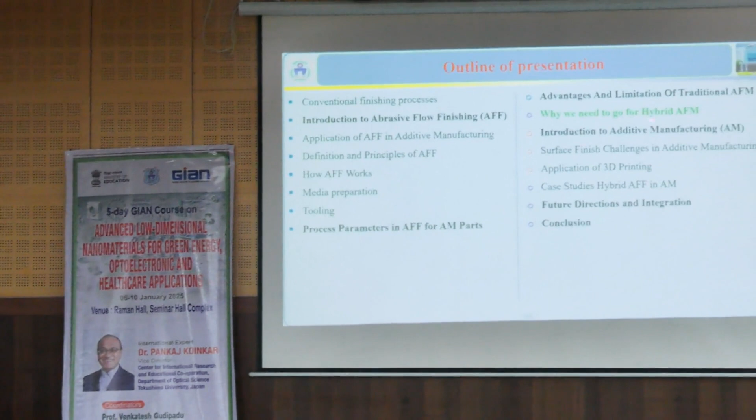So the major outlines of the presentation will be discussing conventional finishing processes and their limitations and advantages, introduction to abrasive flow finishing process, and several things about surface finishing challenges of AM components and future directions, some case studies, etc.

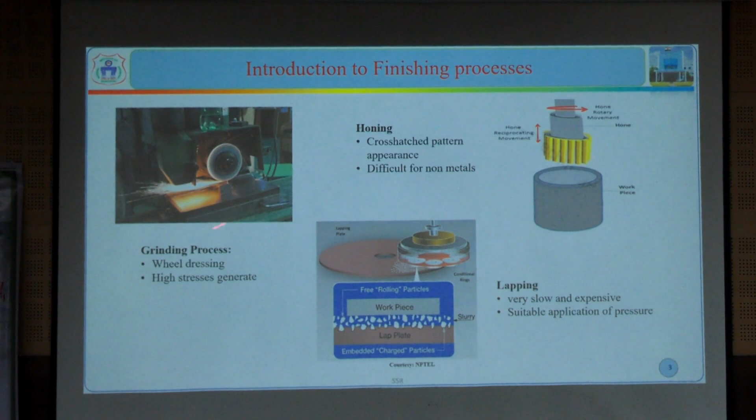So we all know what finishing processes are, right? We have conventional finishing and non-conventional finishing processes. In conventional finishing processes such as grinding, honing and lapping, whenever you finish the materials, there are some constraints with respect to the geometry of the material. You can finish only a flat workpiece, or a cylindrical internal surface and external cylinders using a cylindrical grinder, and sometimes some concave surfaces using processes like grinding, lapping, honing, etc.

In these processes we use fine abrasive particles which act as a tool material. These fine abrasive particles remove the workpiece material in the form of chips, and these chips are in microns and nano level - so the material is removed at micro and nano level. These processes are not complete machining processes, they are finishing processes, meaning the material removal will be very low - in milligrams.

So there are certain processes where we get a cross hatch pattern. When we have a rotary as well as translatory motion, there is a chance of getting a cross hatch pattern, and we have some applications for getting the cross hatch pattern in finishing.

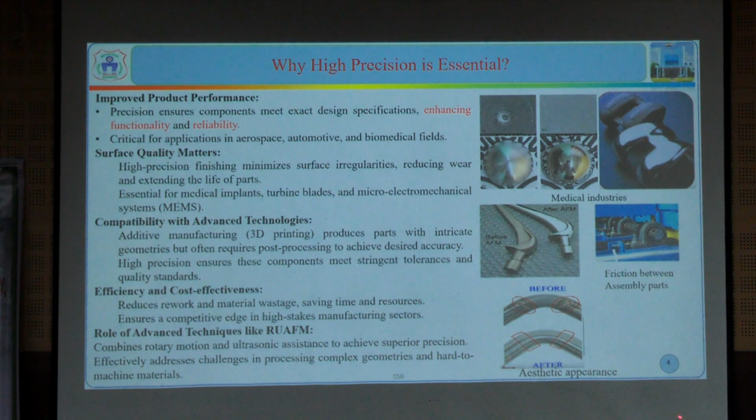Coming to surface finish challenges, we see complex components manufactured using additive manufacturing. You can see several implants here - orthopedic, dental implants - and several of these implants are 3D printed.

We will also see the lab today - the 3D printing, metal 3D printing lab, as well as our abrasive finishing lab. We'll also plan a Siemens visit, though this is not done for your batch, so that also will be planned.

So in order to address these issues, what is our problem? Our problem is if the components are very complex in nature, how to finish them, how to deburr them, and how to radius them. For such complex geometry we need certain advanced processes, not like grinding and honing lapping, which can be possible only for simple geometry.

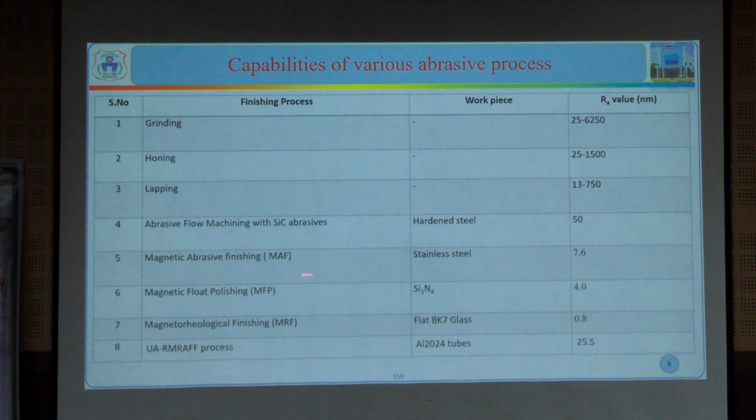When we see the capabilities of several finishing processes, finishing at micro level, nano level, and even Angstrom level, there are processes such as grinding, honing, lapping, abrasive flow machining, magnetic abrasive finishing, magnetic float polishing, magnetorheological finishing, and some hybrid processes.

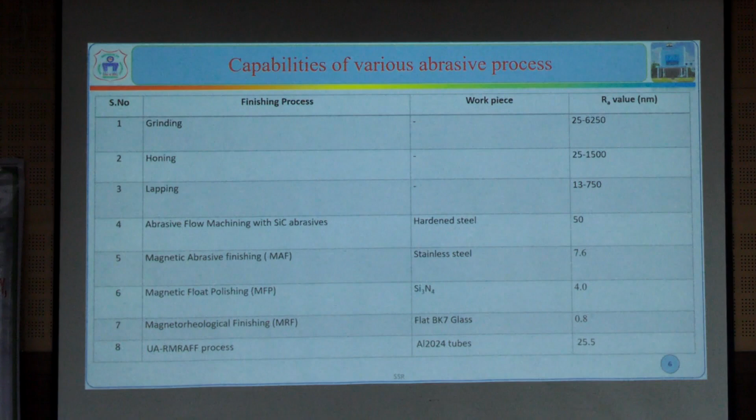So in all these processes we see what are the capabilities. You can see the Ra value in nanometer - this is the capability of grinding, this is the capability of honing, and we can observe the capability of abrasive flow machining. Our target is to reach nano level finishing of the complex components.

So I am working on one particular method - the name of the method is abrasive flow machining. This setup will achieve nano level finishing of complex geometries.

So what are the general challenges in modern metalworking industries? Development in material science - you have seen several cases of how material science is advancing, how new alloys and new materials are coming in the research field and in industry. So how to target them and make a possible solution for achieving the required specifications - one solution is abrasive flow machining.

Abrasive flow machining is a process developed during the 1960s, so it's not new. It was developed in 1960 by Extrude Hone Corporation in USA, and it got patented by the company. This technique comes under advanced machining processes as well as advanced finishing processes, and is capable of deburring, radiusing, polishing and removing the recast layer of finished components which are difficult to finish, and is used to finish complex internal passages of components.

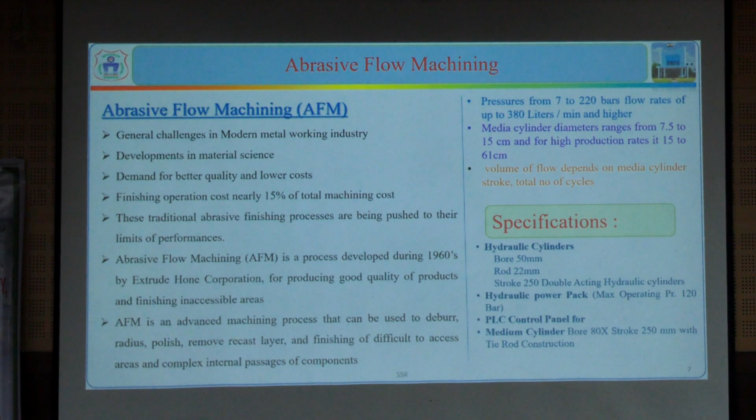Here I would like to show the principle of abrasive flow machining - the major principle and material removal mechanism. In this particular process there are three major components: one is the machine, second is the flexible tool, and the third is the fixture where we fix the workpiece. The machine we are using is a two-way acting hydraulic setup.

Can you see the image? We are using a two-way acting, vertically mounted hydraulic setup. Using this setup we can control pressure, flow volume, and flow rate of the hydraulic pressure - that's how we apply it.

And we have a semi-solid tool which is flexible in nature, kind of like the slime kids play with - we know how slime behaves. This kind of material is mixed with sharp-edged abrasive particles, and that is pumped in between the workpiece.

Let's say here we have a workpiece, a cylindrical workpiece, and this semi-solid media is pumped to and fro, flowing in between the target surface. When you pump this media under high pressure, passing over the target surface, the abrasives present in the media flow on the work surface, hitting the asperities at a certain force generated by the applied extrusion pressure.

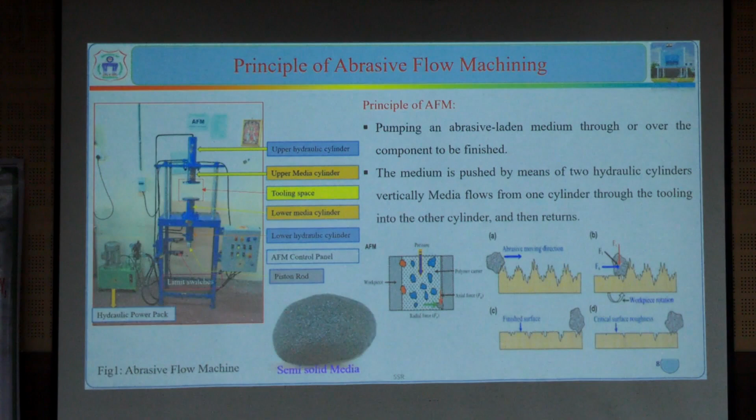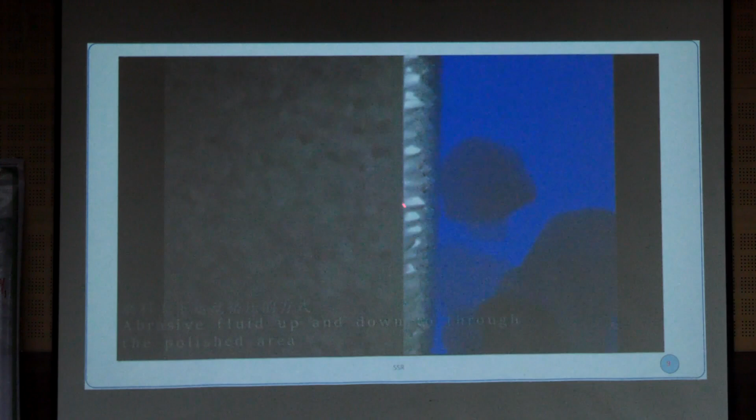So this is the technique I'm talking about. The yellow color shows the abrasive media and the blue color shows the workpiece. While pumping, these abrasives with a certain axial force cause abrasion to take place. You can see here the workpiece, non-cylindrical hole, internal finishing as well as external finishing done with abrasive flow machining.

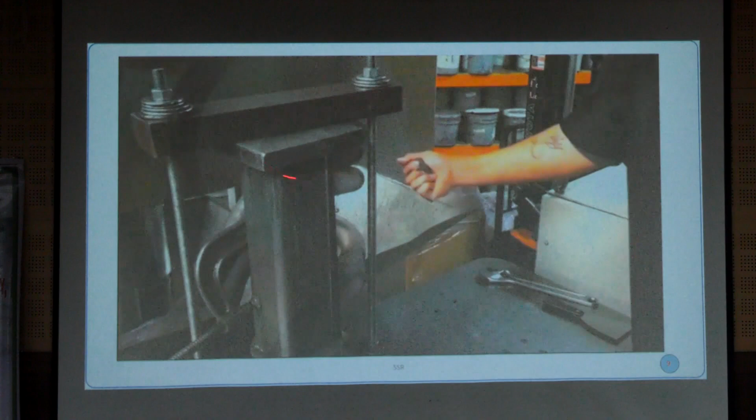This is a bit difficult to use as a simple process. In this video you can see the semi-solid media showing the abrasive particles. We can use silicon carbide, aluminum carbide, aluminum oxide, and boron carbide abrasives. You can see the media after mixing with the viscoelastic polymer, which we use as a gel for mixing the abrasive media.

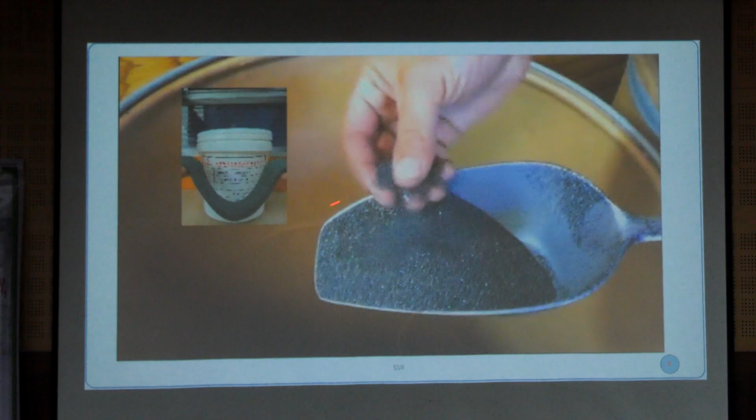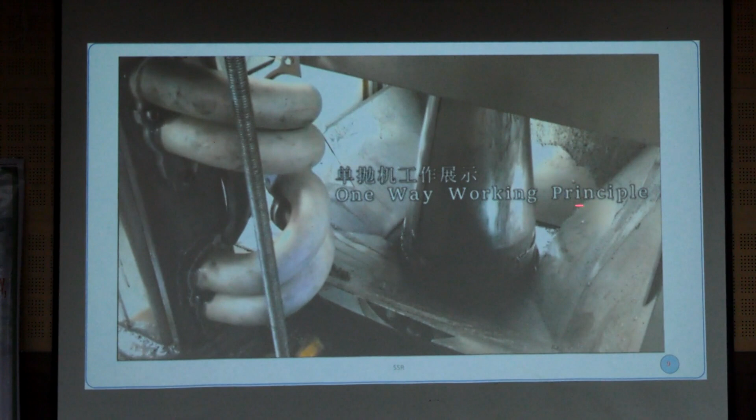This is a flexible tool, pumped in between the work surface. In the video you can see they are using a one-way abrasive flow machining, pumping that semi-solid media with high pressure, and the media is coming out from the workpiece.

This is the workpiece - these are manifolds used in our automobiles. The media is coming out from them, and while coming out it is doing the radiusing, deburring, and required correction. So we need to control that.

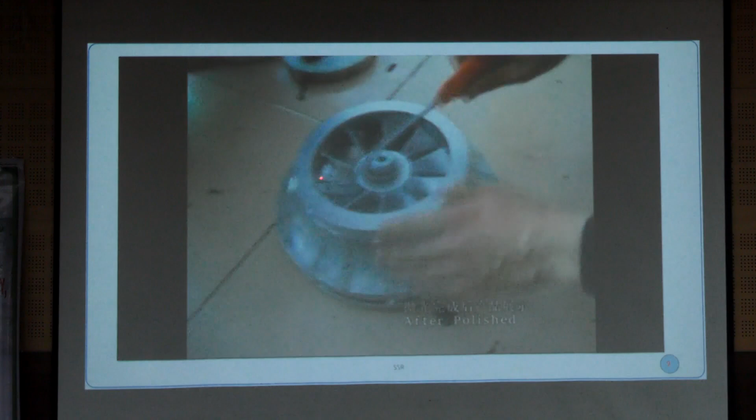These are some automobile components with complex geometry. After finishing, they remove the media. The media property is very important here - I will explain after the video.

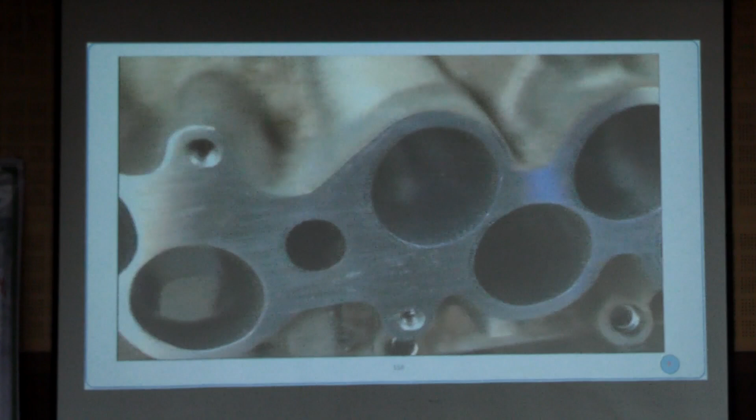You can see these kinds of components which are casted will have several issues after casting, so we require post-processing of these components - to radius them, to deburr them, to finish as per the requirements. So we do a lot of finishing techniques required.

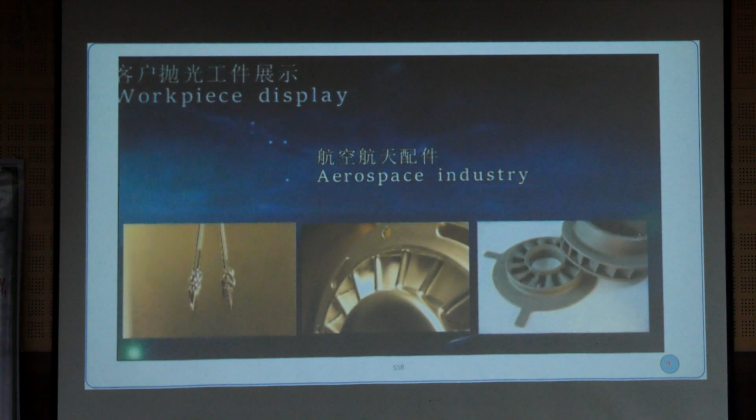And 3D printed components - using 3D printing we can print several complex geometries, and these 3D printed components can be super finished. In the aerospace industry, several components can be finished up to the nano level using this particular process.

Finishing of cross holes - for a straight hole we can use a simple process, but finishing of a cross hole, finishing of a blind hole, finishing of extrusion dies which are complex in nature, like you can see the channels - how do we finish the channels? Aluminum extrusion dies with different shapes.

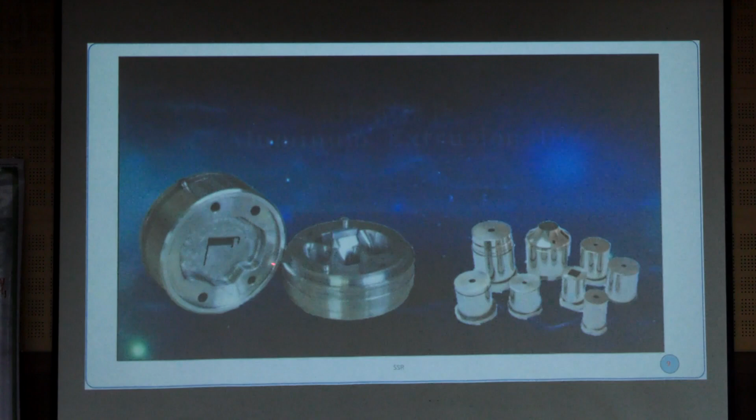Finishing of non-metals as well - ceramics finishing and polishing of several opticals, bent pipes, and metallurgical molds which are very hard with complex geometry. So mold polishing, even finishing of screw threads, glass mold polishing.

So I think you got some idea about the process we are discussing. We are using a novel flexible tool for finishing complex geometries. This tool, which is flexible in nature, will have viscoelastic properties - it will carry viscoelastic properties.

So what is this viscoelastic behavior? There is a lot of study on viscosity and also elasticity behavior of the polymer which we are using in the study. For example, when you brush your teeth with toothpaste - toothpaste viscosity is different and it has a different behavior, kind of a viscoelastic behavior, like a toothpaste gel.

If you add some salt particles to toothpaste and brush your teeth, you are applying certain pressure and brushing. The result is your teeth will shine because the paste is carrying the salt particles successfully and you are reaching the target finish.

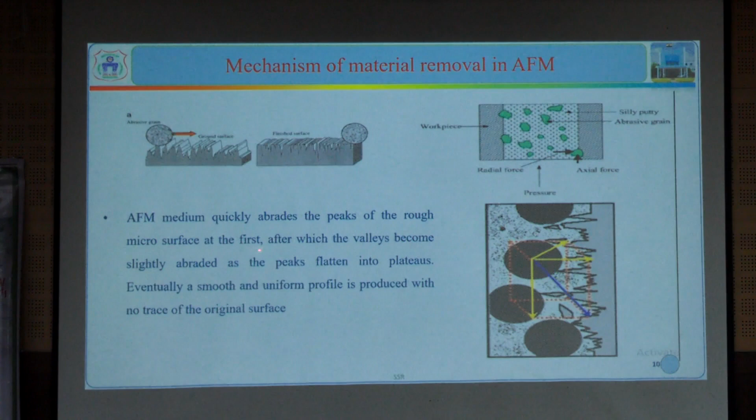The principle explains that in abrasive flow machining, the media quickly abrades the peaks of the rough microsurface first, after which the valleys become slightly abraded as the peaks flatten into plateaus. Eventually a smooth and uniform profile is produced with no trace of the original surface. So this is what happens during the process.

These abrasives hit the target surface and small microchips are removed from the target surface, and the process continues.

The third important component in the process is tooling, as was asked, like how the tooling is designed for different geometries and different workpieces, how the finishing is made possible. The major role of the tooling is that it holds the workpiece and also guides the media so that the media passes on the target surface.

So these two things we need to keep in mind while preparing the tooling or fixture. When we prepare a fixture, we need to keep in mind two things: one is a proper seat for your workpiece. You can see here, this workpiece is different, this workpiece is different, and there is some complex fixture here.

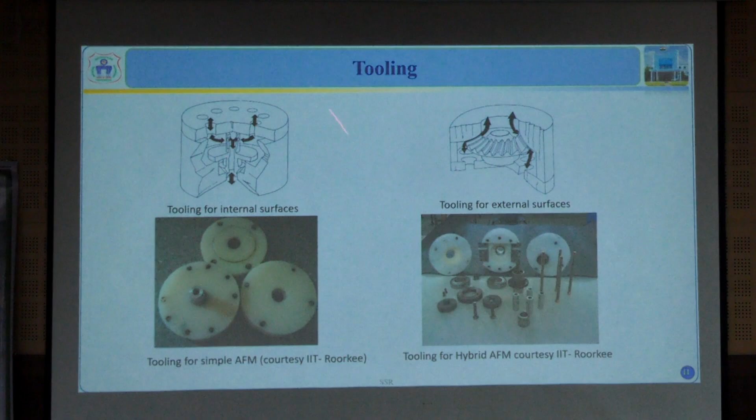For your designed workpiece, for your desired geometry, you need to first prepare a fixture. That fixture allows the workpiece to sit and also guides the media so that the media passes on the target surface.

So these two things. See the applications in turbine engine parts, before and after, in medical implants finishing, and whatever video we have seen. So we have seen all these kinds of applications.

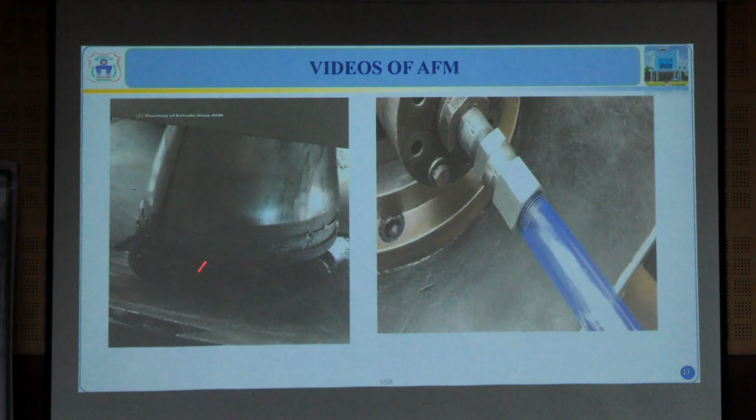To have some clarity on the finishing of bent pipes, complex geometries, and the flexibility of the media, this is a mixture with some mixing oil. In the laboratory you will see the media preparation as well as the fixture preparation, how the fixture is prepared, and then how the finishing takes place using this flexible media.

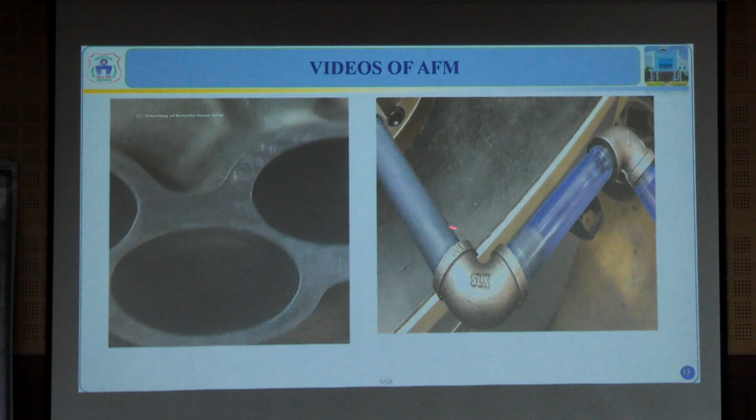So you can see here, this is the workpiece. This shows how the media is pumped to and fro, and how the finishing is taking place.

So whatever setup we developed was based on our project, based on our requirements in the lab. This is the design model. Initially we thought of designing the abrasive flow machining, or vertically acting abrasive flow machining. This is the design model and this is the fabricated model, and you can see the fixture.

So this is the fixture. If you disassemble the fixture, you will see the seat for the workpiece as well as the guidance of the media, so that the media flows to and fro on the target surface.

Okay, so we are targeting to finish the internal geometry of this workpiece, and how it can be done and what are the parameters that are playing a role and how the finishing takes place. So this video will show you the to and fro action that we expected.

So these are the medium cylinders, these blue color medium cylinders, and two acting hydraulic cylinders are there. We fill the flexible media inside one cylinder and pump the flexible media to and fro, passing through the target surface, in between the fixture. So this is a simple AFM. We will see some advancements, how people worked on different aspects, etc. So this is a to and fro action.

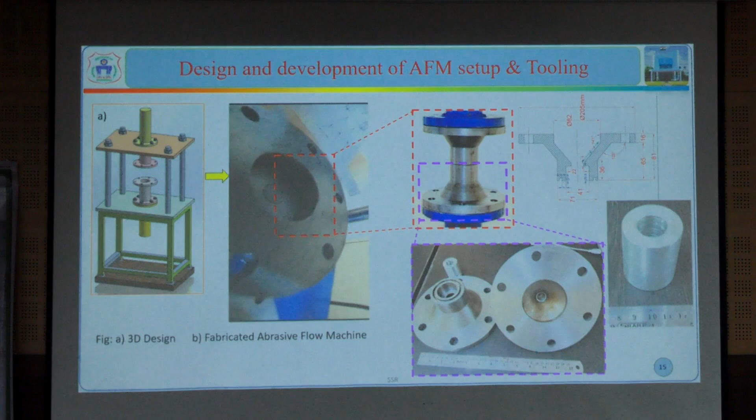Now we understand the principle, right? So what is the principle and what are the major components? As I said, three major components: one is the setup, second is the flexible media, and the third is fixture.

So we have designed, the literature says the influencing parameters of these three major components. When we take the machine settings, the major machine, extrusion pressure will play an important role. What is the pressure you are applying on your abrasive media, and based on that pressure your axial force will vary. The abrasive particle which the media is carrying will have certain axial force with respect to the applied extrusion pressure. So by varying the pressure, we actually have influence on the result.

Second is the number of cycles. How many cycles, like when we pump the media from one cylinder to another cylinder, we calculate it as one cycle. When the media is pumped from bottom cylinder to top cylinder and then from top to bottom again, we calculate it as one cycle. If you increase the number of cycles, the surface finish rate will vary. The surface finish will increase, and also the material removal will increase. So this is also one of the important parameters.

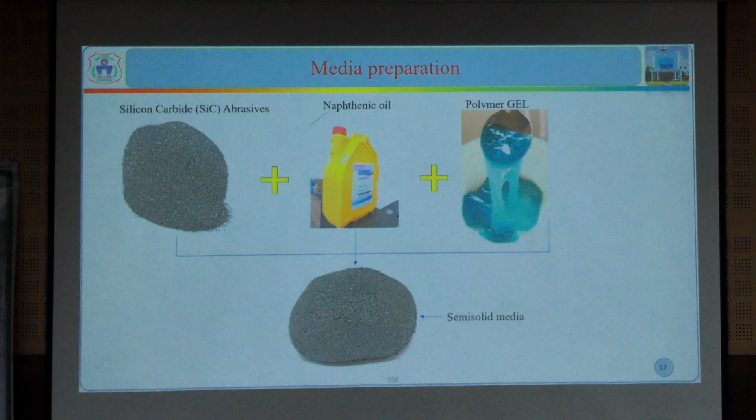So this is the media preparation. We will show a small demonstration also in the evening. The abrasive particles are mixed with the mixing oil, we use naphthenic based oil here, and the polymer gel, and how it becomes a flexible media, a semi-solid media, and how it can be tested, and how it can be used for functioning, for processing, for finishing, etc.

We use different grades of silicon carbide particles like 120 size, 80, 60, even 180 size, etc. Under scanning electron microscope, we have identified the size of the particle, the size we are choosing, and also the shape of the particle we can identify.

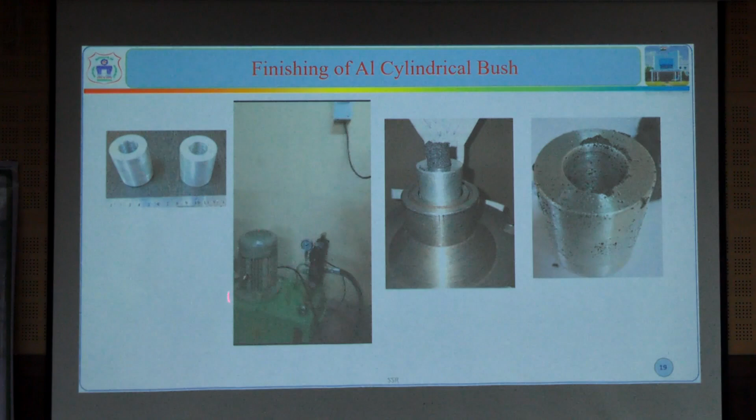While pumping the media, we observed before and after finishing of the sample under the defined pressure.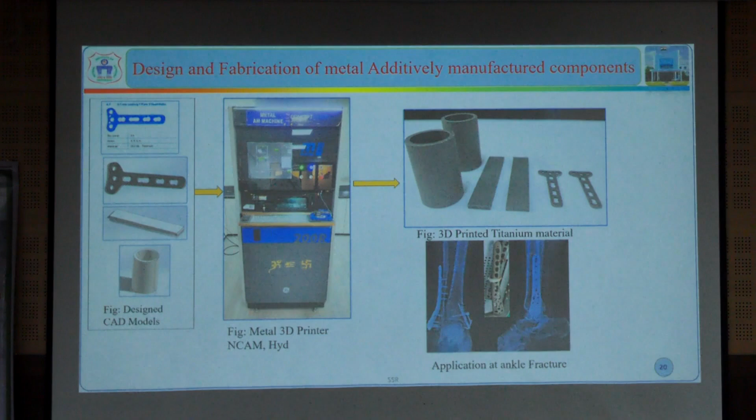We are also working on 3D printed components which have applications in medical, mainly fracture plates used in fixing the ankles. These fracture plates are planned to be finished using abrasive flow machining. We are studying before finishing and after finishing of the fracture plates. These are the 3D printed components. As part of the lab, we will also show the 3D printing lab, as well as our finishing lab, so you will get some idea of what we are working on.

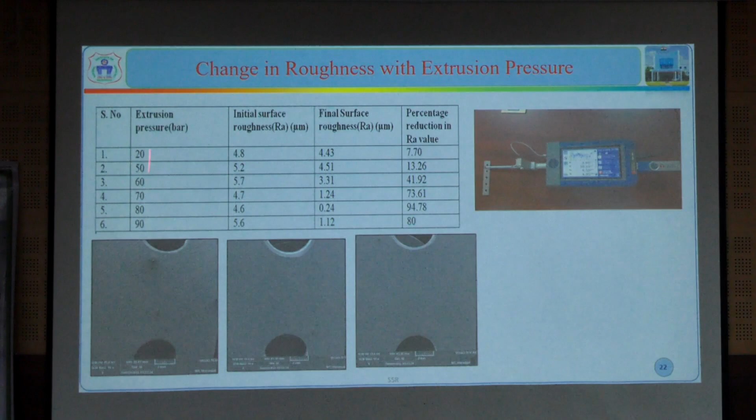We observed the finishing of the samples by varying the number of cycles and the extrusion pressure, and we could achieve some kind of mirror finish before and after abrasive flow machining. You can also see these are the conventional machining marks, the deep tool marks which are found by conventional machining, and the deep feed marks or deep tool marks are removed by abrasive flow machining.

This is not a final achievement. We need to work on improving it better. We need a mirror finish, mirror reflection, and also we need to take more complex geometries for finishing. So these are some of the results.

These are some of the results at different cycles: 50 cycles, 150 cycles, 350 cycles, 450 cycles. As I said, one cycle is equal to when we pump in a to and fro action. Here we observe that at 450 cycles we are getting a certain finish.

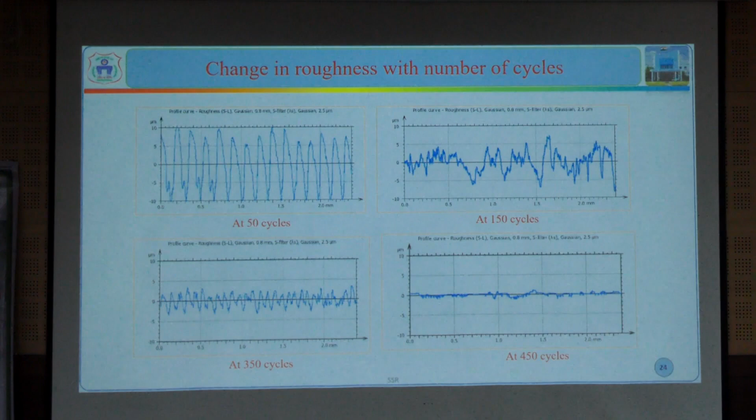The RA value, let's say, goes from 1 micron to some value as per the scale here. The finishing RA value is not exact, but you can see the maximum peak here is say some 10 micron, and here you can see some 0.1, 0.2. But this is not sufficient, and we also observed that it is taking more time. 450 cycles is huge, so we need to spend a lot of time for finishing.

So these are some of the observations on the fracture plate, and some applications of this particular process, especially finishing the recast layer formed by the EDM process, and finishing 3D implants, 3D printing components. Nowadays this is a very important application. In aerospace industries also, people are looking for a novel process for finishing 3D implants.

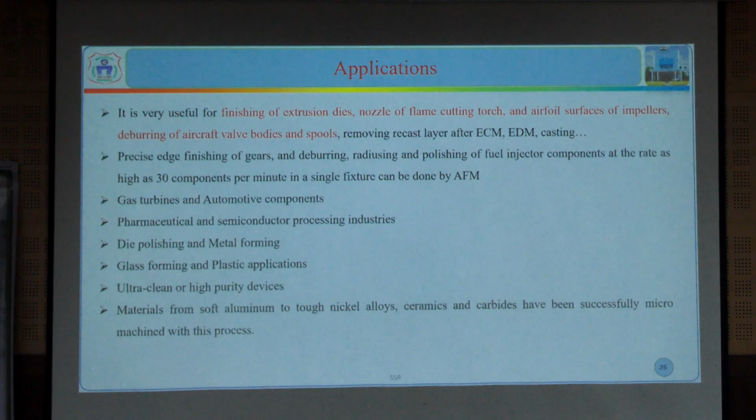In the recent ISRO project brochure released, I think some might have seen it, there also there is one project requirement where they are looking for a process which can finish aerospace components that are printed using 3D printing. In that application we can see how abrasive flow machining and other processes can be utilized.

The literature says that 80% of the cost of the final finishing component can be saved compared to manual processes, if you use a mechanical process comparatively to manual. So the process is easy to operate, and it is used to reach high tolerance. It can be used for high-end finishing, and it can finish inaccessible areas.

So there are several advantages, but the major disadvantage is that the process is slow. It suffers with low finishing rate, and a lot of processing time is increased, which implies an increase in the manufacturing cost of the overall component. Since the process is slow, the material removal rate is also very low, in milligrams.

So in order to address these limitations, a lot of research started to hybridize the process. We will discuss a few. Many people have tried different techniques and approaches to hybridize the process. So what is hybridization? Combining two or more techniques to improve the efficiency of the process. So how is abrasive flow machining hybridized, what are the results, and what are the major achievements of this hybrid AFM? We will be discussing this.

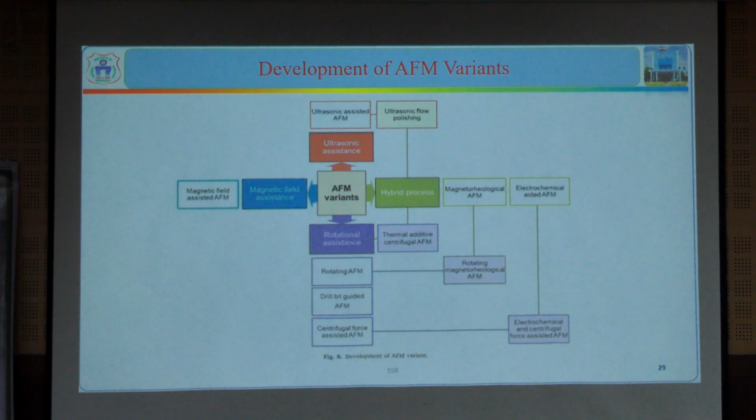There are some magnetic field based abrasive finishing, ultrasonic assisted abrasive finishing, rotary based abrasive finishing, drill bit guided, centrifugal guided, and electrochemical abrasive finishing, etc. The people who are in mechanical background—I have seen some 2 to 3 or 4 participants specifically from mechanical, and of course it's a combo of different people—we understand how this hybridization helps and what kind of hybridization they are doing and how they are addressing those limitations.

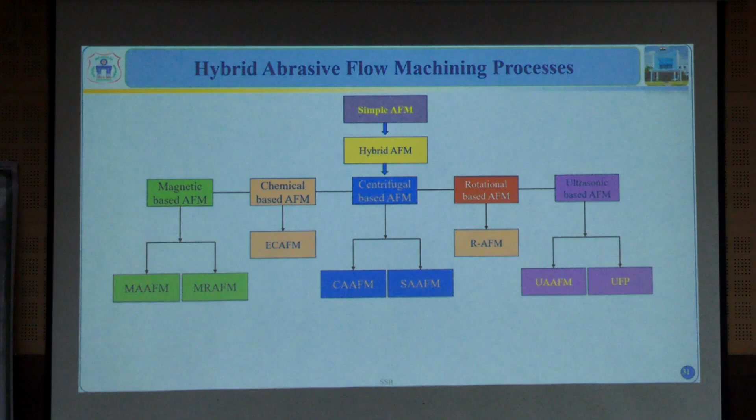So I would like to show the hybrid AFM types again. Magnetic based abrasive finishing is further divided into two types: magnetic assisted abrasive flow and magnetorheological abrasive flow. People also tried chemical based abrasive finishing, so electrochemical abrasive flow finishing, centrifugal based abrasive flow finishing—here centrifugal assisted and spiral assisted abrasive finishing—rotary based, ultrasonic based, etc. There are several types, and every hybrid variant is one PhD work. I worked in this particular area where I used ultrasonic based methods, using ultrasonic vibrations, to see how the finishing is improved further and how I addressed the limitations of conventional abrasive flow machining.

Let us see one of the hybrid variants: magnetic assisted abrasive flow machining. Here also the principle is the same. You can see the abrasive media, the two-way acting hydraulic setup, and the workpiece tooling—they are using a cylindrical bush as the workpiece. When we pump the media to and fro, the media will flow on the target surface at certain extrusion pressure. We look into the media viscosity, media flow volume, media flow rate, and the constraint created.

Everything is taken care of. Apart from that, there is a modification in the setup if you observe—electromagnets are arranged, magnetic field is arranged around the tooling. When you vary the magnetic field density, when you vary the current, the media reacts under that magnetic field. They tried using magnetic workpieces, magnetic materials, and also non-magnetic materials as the workpieces. They added some iron particles, small iron carbon particles, in the media, prepared a different media, and pumped it. When the magnetic field is on, they observed that these iron particles mixed with silicon carbide have more impact in the tooling zone, because the tooling zone is under the control of the magnetic field.

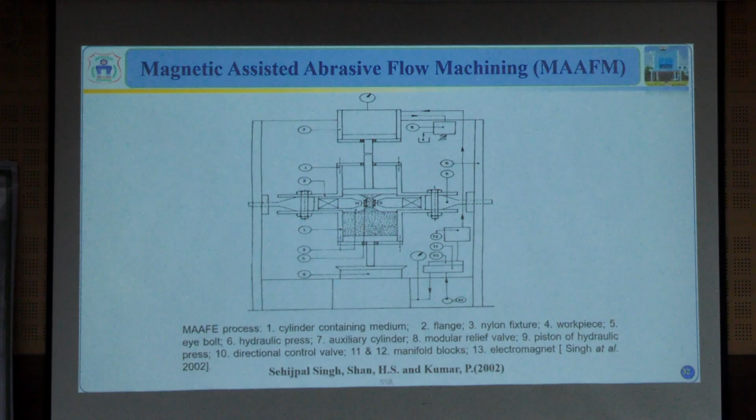So the result is there is more active abrasive grain density, meaning the abrasives participate more when the magnetic field is applied than without it. They studied how the finishing rate improved and how the material removal improved when the magnetic field is on. They also studied by varying the current and other parameters related to the magnetic field, how it impacts finishing, etc. But they did not study much on the magnetic viscosity of the media or what is happening to the rheology of the media. They studied mechanically how the finishing and material removal take place when pumping the media to and fro.

As I said, they did not study more on the rheology of the abrasive media, like finding out the magnetic viscosity of the media. In the next year, 2004, another researcher developed the same kind of setup, but concentrated more on magnetorheological properties of the media. In the previous case, in 2002, they conducted that study and got their PhD. These are all done mostly in IITs, and they worked more on magnetorheological abrasive flow machining.

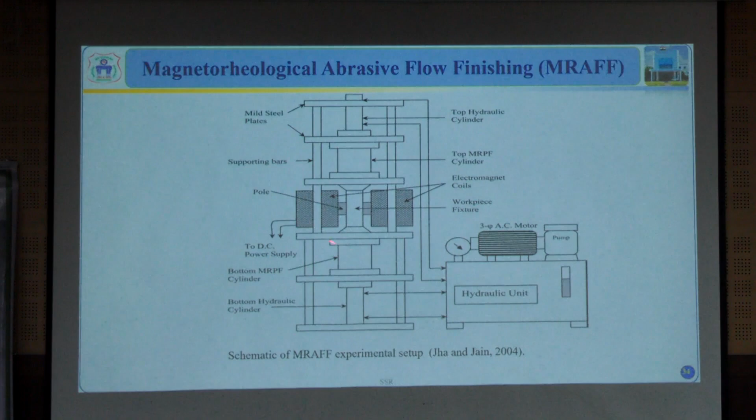So what is the difference? They studied more on the rheology of the media. I will show you that. When you are pumping the media to and fro, they added carbonyl iron particles inside the media, along with the silicon carbide particles. When the magnetic field is applied, these carbonyl iron particles form like a chain, and this chain formation is possible when you apply magnetic field around the tooling.

What is the purpose of this chain formation? They explain it in a schematic. When the silicon carbide particle is surrounded by an carbonyl iron particle chain under magnetic field, not only does the abrasive particle have more interaction with the asperity, but it also gets more axial force because of the surrounding carbonyl iron particles. So the hitting tendency of the abrasive is increased. These are the asperities on the workpiece, and due to this chain, there is more active participation of abrasive particles when the magnetic field is applied.

So people are working on synthesis of abrasive particles, on the type and shape of the particle, and the carbonyl iron particle size, to have better control on the process.

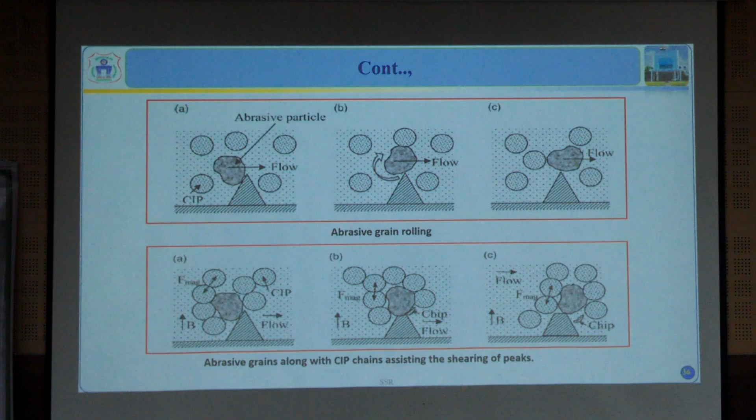This magnetorheological finishing process is an ongoing project even at ARCI, where people are working on finishing optical surfaces for bulletproof opticals. They want angstrom level finishing, so they are developing this process by mixing the media with carbonyl iron particles, along with chemistry to study the synthesis of the particles. Several aspects are being worked on—not only mechanical abrasion but also the rheology of the media, involving physics and chemistry for better control during finishing. Their target is to finish components used for safety purposes, like bulletproof opticals, and figure out how to finish them.

Another advancement in hybrid AFM is centrifugal force abrasive flow machining. This author tried to control the process by introducing centrifugal force. He took the fixture design as a challenge in this process, and made a patent on the fixture. I will show the image of the fixture.

This is a simple fixture with some addition—a rotating attachment as well as a centrifugal rod. They fixed a centrifugal rod and created a fixture with a rotary mechanism. This centrifugal rod is inserted in a cylindrical bush, as you can see here. They rotated this centrifugal rod and the centrifugal force is generated.

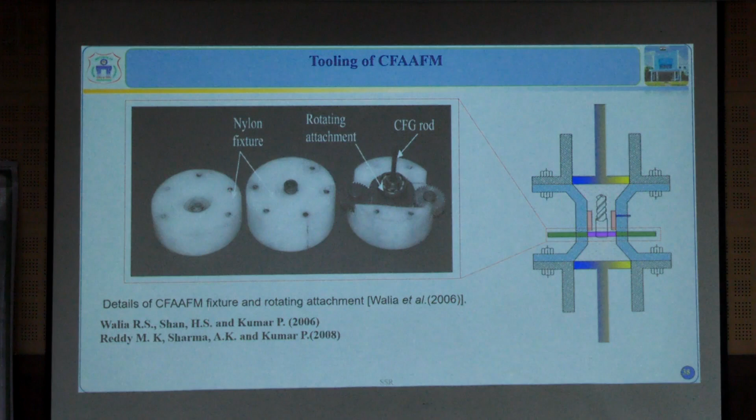Our target is to finish the cylindrical geometry in this process. They worked on finishing a cylindrical bush workpiece by varying the size and shape of the rod. They observed how the constraint of the media is created and how finishing is improved, and also observed that when the rod is rotated at different RPMs, what is the impact on abrasive flow machining—on surface finish and material removal rate—during that rotation process.

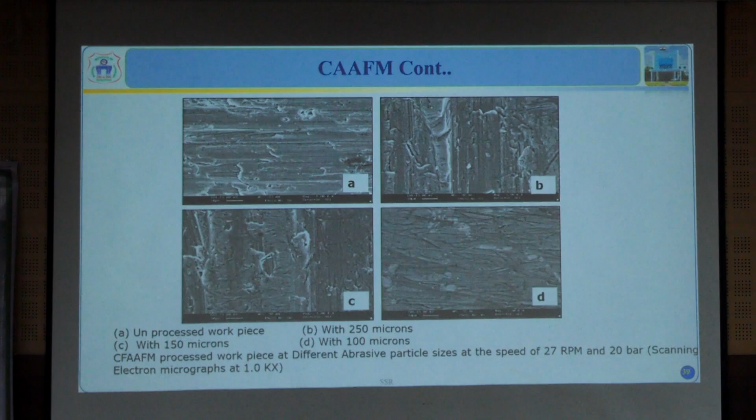So this is one of the hybrid variants. They worked on several materials and claim that this process gives better results compared to simple abrasive flow machining. Another author has tried rotary abrasive flow machining.

So in this particular process, the workpiece fixture is rotated, meaning the workpiece is inserted in a fixture and that fixture is rotated when you are pumping the abrasive media. You can see here they are using a one-way AFM, one-way hydraulic action, and on the other side a spring loaded and sliding disc. So once you release the hydraulic setup pressure, the back pressure, the spring will do its action. This means we have a two-way action, but the design is different.

So on the other side we are not using a hydraulic setup, we are using a spring loaded sliding disc, and they inserted a spindle connected to a motor. When they rotated the spindle, the workpiece is also rotated since the spindle is connected to the workpiece fixture, and they pumped the media. So they rotated the fixture which is immersed in the media, while also pumping the media, and they observed some different results.

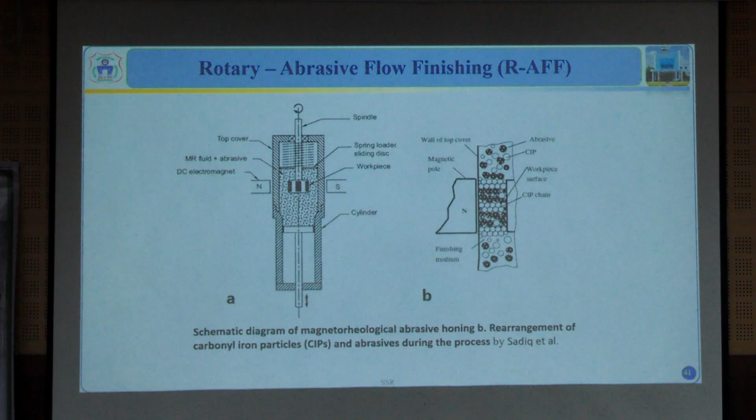But our job is to make them more active by giving certain hybridization, like by rotating it, by vibrating it, by applying a magnetic field, or by generating centrifugal force. So there are several concepts, several things done by several people.

Next, the author tried drill bit guided abrasive flow machining. In the previous case we have seen the workpiece is connected to a spindle which is rotated. But in this case, the author inserted a drill bit rod inside the workpiece and controlled the finishing, naming this process drill bit guided abrasive flow machining. I will tell you what is the major outcome of this process.

So the drill bit is inserted in a cylindrical bush and they are pumping the media to and fro. Due to the helical flute path of the drill bit, the reciprocating axial flow is possible as well as scooping flow, because we are pumping the media. So media is reciprocating and flowing on the work surface, with a drill bit in between. Due to the helical flute behavior of the drill bit, there is more possible flowing action of the media, in both axial flow and scooping flow.

Because of these two different types of flows, they observed the material removal rate is more compared to simple AFM process. Because of the geometry of the drill bit, they observed more interaction. So the author tried to increase the abrasive grain density, meaning the active participation of abrasives on the work surface, since the major limitation of the simple AFM process is it is very slow, with a low finishing rate. So they wanted to increase the finishing rate.

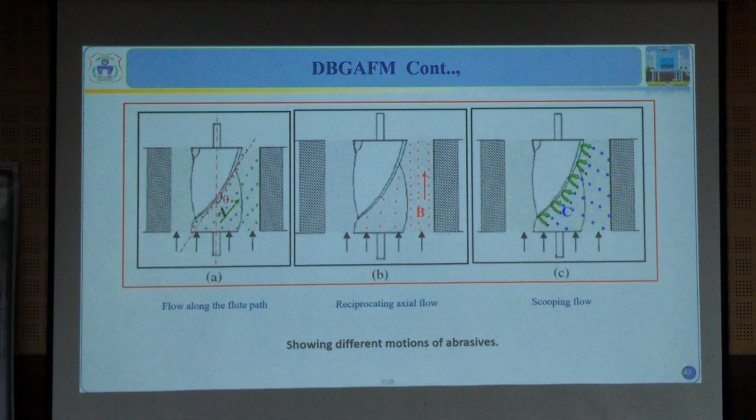So they tried in different ways. One author tried using centrifugal force, one tried using magnetic field, one tried using rotary motion, and one tried drill bit guided AFM. In that last case, he did not rotate the drill bit, only by the nature and design of the drill bit, how it is impacting on the work surface.

Next, rotary abrasive flow machining - similar to the previous process, but explored in a different way. He took a two-way acting abrasive flow machining setup and rotated the entire fixture. In the previous case, the workpiece was inside the media, but here the fixture is rotated, the workpiece is inside the fixture, and the media is flowing on the work surface.

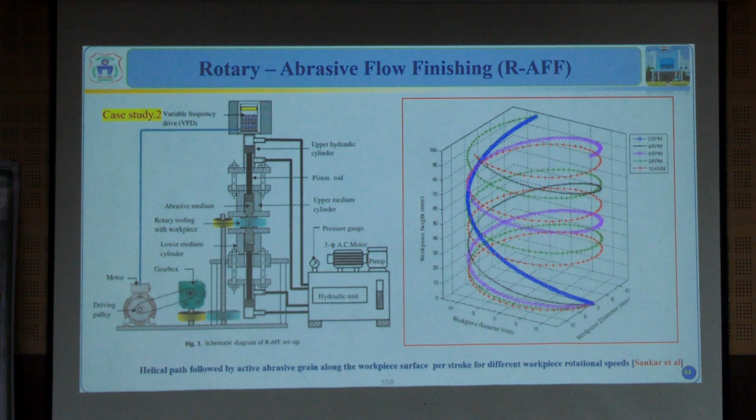So what happens here? He observed how the abrasive media flow inside the work surface varies by varying the RPM. The flow of the abrasive media is controlled by rotating the workpiece. He also worked on the helical rotation of the work region, and how this helical motion helps in finishing and improves the finishing rate in this particular process.

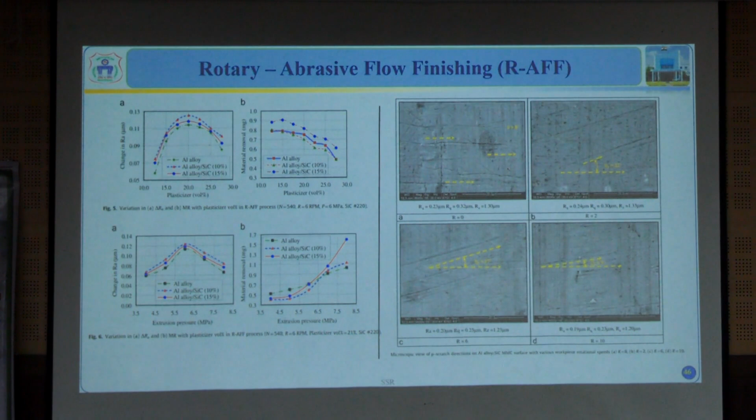He has studied several workpieces, and several results were published and compared with simple AFM process. You can observe images showing abrasive scratches in a helical path, and that flow behavior explains the rotary behavior of the workpiece. The results also show the change in RA value by varying the abrasive media and the extrusion pressure, and we can see the trend curves of how the result increases and then decreases.

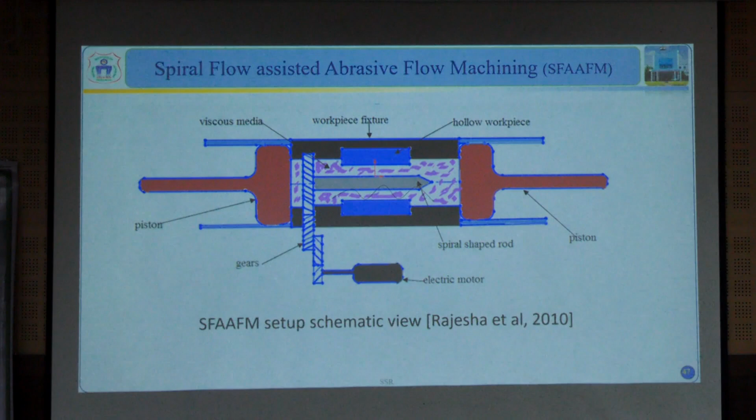Another author tried spiral flow assisted abrasive flow machining. As I said, in drill bit guided AFM, the drill bit is not rotated, whereas in spiral flow, they rotated the drill bit and tried it on different workpieces. They observed that at lower RPMs it gives better results due to a scooping action, while at higher RPMs that scooping flow is missing and it acts as a simple rod. So they recommended that at lower RPMs, spiral flow assisted AFM gives better results compared to simple drill bit guided abrasive flow machining.

And ultrasonic flow polishing—this is the first hybrid method introduced, combined with the AFM process. Ultrasonic flow polishing is a combination of AFM plus USM. We all know the ultrasonic machining process, and we've also seen abrasive flow machining, so when they combine these two, what is the result? They worked on finishing a blind hole.

Their workpiece is a blind hole, and they targeted finishing it. When pumping the media to and fro, one way they apply extrusion pressure, and the tool is designed so the media comes out from it while the ultrasonic tool vibrates at high frequency. The abrasive particles in the media are excited due to this high frequency, and a small gap is maintained between the work surface and the ultrasonic tool. Due to these high frequency vibrations, the abrasive particles become more active compared to simple AFM, so they remove more work material from the surface. This process is majorly used for finishing blind holes compared to through holes.

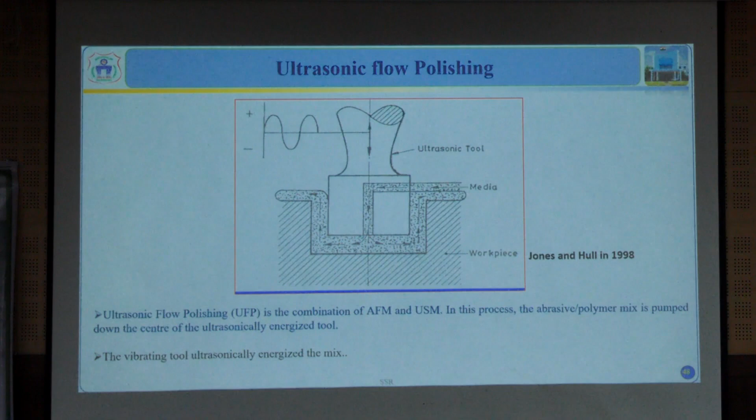Next is the area I worked in: ultrasonic assisted abrasive flow machining. In the previous case, they vibrated the media and got better results. In our case, we vibrated the workpiece externally, and we studied how the finishing improved, how the vibration assistance helped in finishing, how we reached nano level finishing, and the process mechanism as well.

With vibration and without vibration, we conducted some case studies. We worked on some application-oriented materials, etc., and we'll discuss a few important things here.

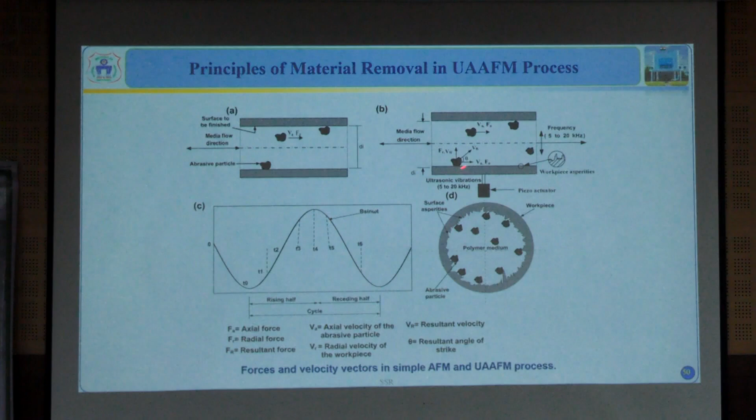This is one schematic I would like to show, like when the vibrations are given to the workpiece, how the particle will have a better resultant velocity compared to simple AFM. In the second schematic...

The illustration shows that when you give vibration at a defined amplitude, the chances of an inactive particle becoming active will increase, because at the rising of the cycle the asperities are advancing, since we are converting the electrical signal to mechanical action.

So we are using a piezo actuator. For me, the mechanical action is important - I wanted to vibrate my workpiece at a defined amplitude, at a defined frequency. So when you advance the asperities, there is a chance of the inactive particle becoming active because of that advancement.

And when you continue the process, there is a chance of cutting action and also intermittent cutting. Because of the continuous sinusoidal cycle, finally the result is the finished surface - the finished nano level surface.

What is important for us is whether the process is rapid or not. So that is what matters for us - with finishing and without finishing, with vibration and without vibration, whether the process is rapid or not.

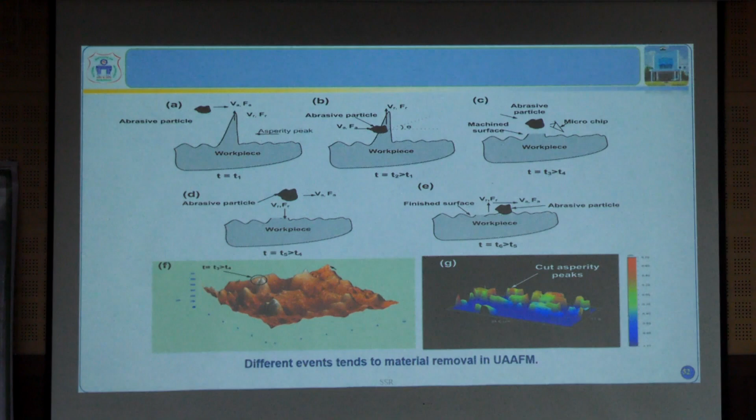We also tried vibrating in the axial direction, parallel to the media flow direction. When you are pumping the media to and fro - in the previous case I showed vibrations applied radially to the media flow direction - now when we apply in the axial direction, how is the impact at the rising and receding of the cycle?

Based on the case study, we observed that when we vibrate radially, the result is better than when we vibrate the workpiece axially, because we are perpendicularly vibrating to the media flow direction, resulting in more interaction of the abrasive particle and more radial force than vibration in the axial direction.

So that's one observation. Coming to simulation and also some case study, we have chosen a bevel gear as a workpiece. So this is a bevel gear.

We all know bevel gears are used to transmit motion for perpendicular shafts. Bevel gear design is somewhat difficult, more intricate compared to simple gears, and we can also try helical bevel gears, right?

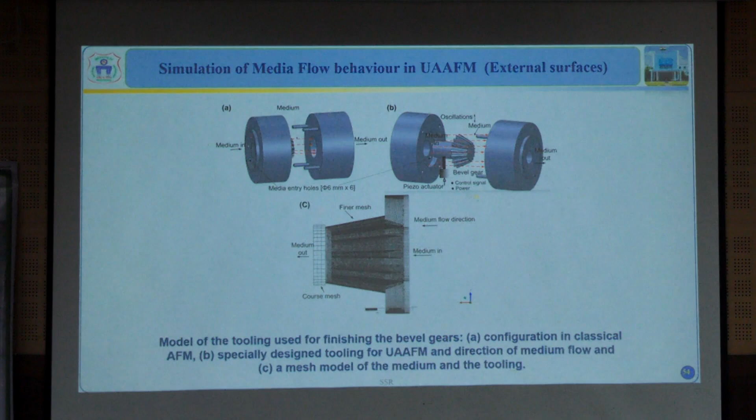So in the case study we have taken a bevel gear as a workpiece, and the fixture is designed accordingly. The fixture is important and plays a role in finishing. It is designed so the media passes on every tooth of the bevel gear, targeting a uniform finish.

So why we studied simulation: we wanted to know the media flow behavior when we vibrate the workpiece, and how the media behavior is changing when we are vibrating it.

We observed that the media flow velocity distribution is changing compared to simple AFM, and the media flow pressure distribution is changing. Also, the velocity vectors of the media flowing on the workpiece are straight in simple AFM, whereas the velocity vectors are perpendicular when we vibrate the workpiece. So that is one observation.

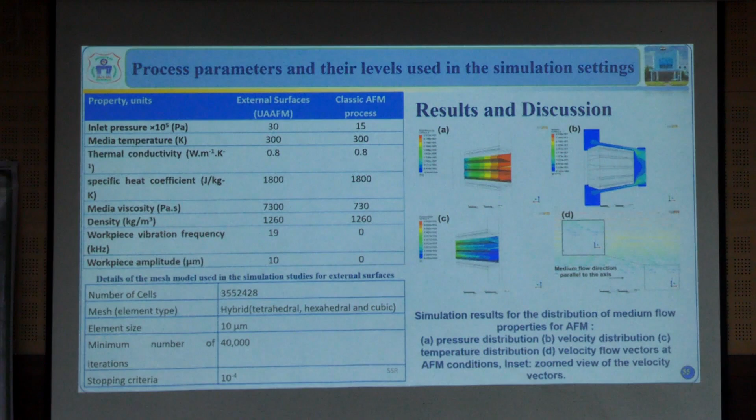And regarding temperature, we observed that it slightly increases when we vibrate the workpiece. With vibration and without vibration, there is a slight increase in the temperature of the media. So these are some of the things we observed in simulation.

When we apply vibration in the simulation process, we observe the velocity vectors traveling at an angle theta, whereas in simple AFM the velocity vectors travel straight. The user-defined function simulation is taking place.

We used ANSYS Fluent in order to simulate the process, applying sinusoidal vibration, as well as media flow both parallelly and perpendicularly.

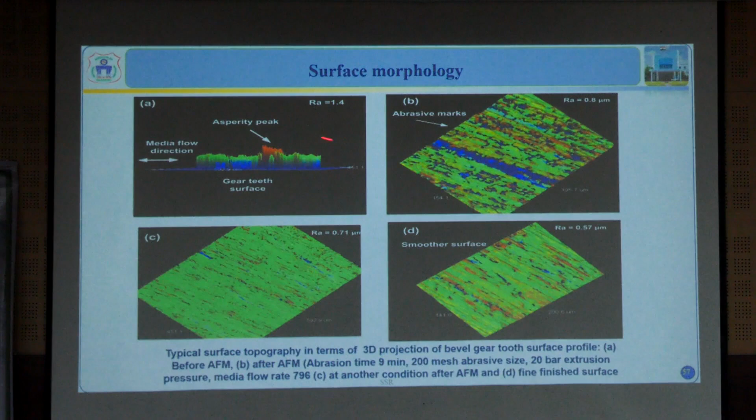So when we vibrate, what kind of result are we going to get? In a sinusoidal cycle, what kind of result are we going to get?

This paper we published in Machine Tools and Manufacture journal, one of the prestigious journals, I think the impact factor is more than 10. We published this work because at that time no one had published on ultrasonic assisted AFM.

There is a process called ultrasonic flow polishing, but there was no process so far that vibrated the workpiece externally while finishing. So this is one result.

Here, this is to show the slope, and how the curve behaves, etc.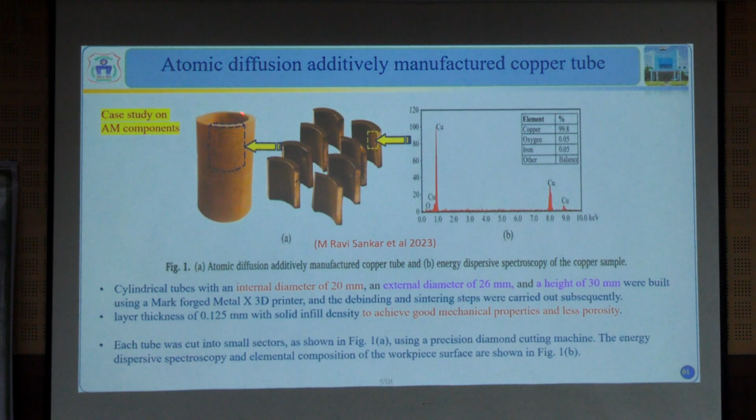As I said, people working on abrasive finishing, which are published in the Additive Manufacturing Journal, chose a copper tube as one case study, a 3D printed component, studying different finishing processes. This is the as-built 3D printed component.

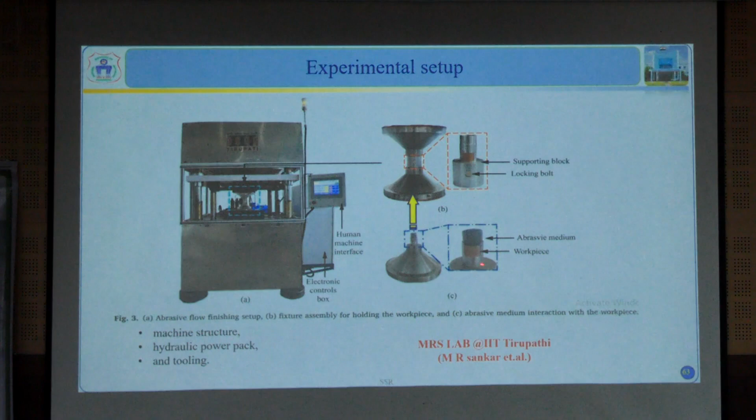So they evaluated longitudinal and lateral surface finish as built, and they chose the setup. This is a big setup they have in IIT Tirupati. So they used this particular setup for finishing that 3D printed copper tube, and I would like to show the result. They used a particular media, the galactomannan abrasive media.

Galactomannan is one of the chemicals they use in food processing, for chewing gum and some candies which have that viscoelastic nature. So they use that particular constituent, glycerol solution, and those constituents for preparing this media, and they got a patent also for this. It is flexible in nature, viscoelastic in nature.

So they are working in more detail, like people who are in the chemistry and physics background - for them this will be a major important area based on today's session. If you can work more on constituents, you can work more on the chemistry of that behavior of the media, its viscoelastic nature, synthesis of the abrasive particle - what kind of constituents we are using, etc.

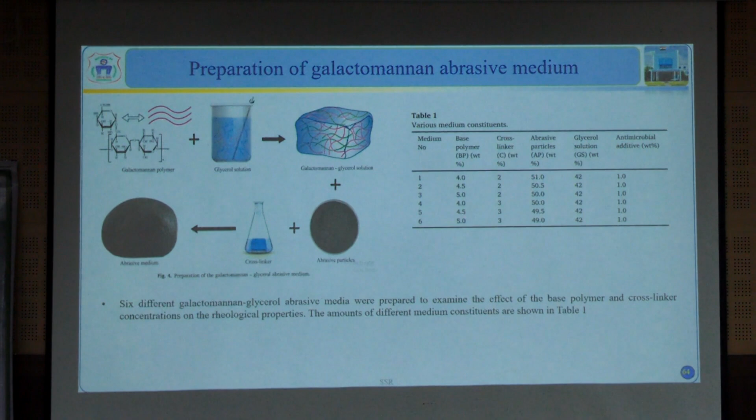But as a mechanical engineer, I will concentrate more on finishing and MRR - how thermally stable this media is, what is its shear viscosity, and how it helps me in finishing, etc. That is my concentration. But someone can work on this area, like how to prepare a novel media with all the properties and functionalities we require.

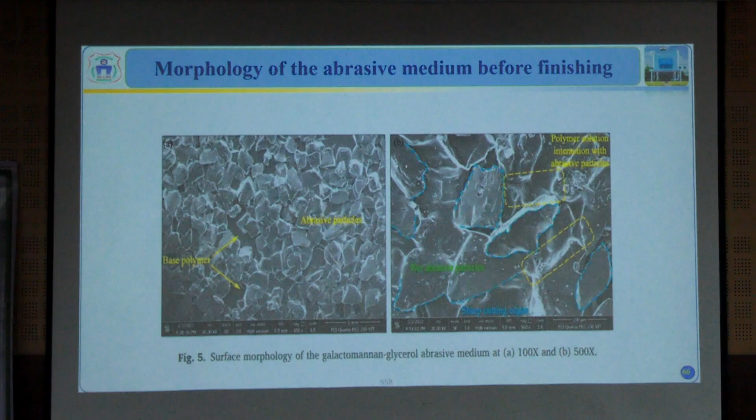So before finishing, this is the media behavior - you can see the separate polymer and abrasives. You can also observe that the polymer is carrying these abrasives successfully, and after finishing you can see some blunt surface on the abrasive, micro chipping, and blunt cutting edges, etc. And after finishing, of course, you can also see the metal powder.

So the metal powder is also mixed along with the media.

Yeah, so as I said, the TGA analysis - thermogravimetric analysis - and FTIR analysis. I think Professor Harinath sir has explained about several characterization techniques, right?

So for non-metals, for polymers, if you want to study in detail about its behavior, its main constants, and time versus temperature, how it is behaving, that is one kind of study you can do.

So in this particular process, whatever we are discussing today, we'll have some laboratory session as well along with the 3D printing lab, so people who are interested can work more on the media behavior, majorly thinking about what kind of requirements we need, what kind of behavior is in detail about that.

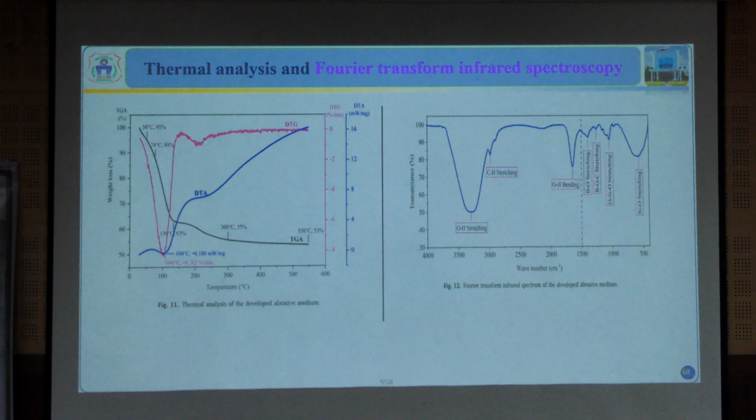We study more on finishing and mechanical things, but the participants may discuss more on the chemical and the chemistry and physics behind the media. So the TGA analysis and FTIR analysis to know the main constants, and coming to the results.

So they were looking after the number of cycles only. So at the number of cycles, how the finishing is taken, you can observe the layer by layer printing of the component, and by applying pressure, how the finishing is taking place.

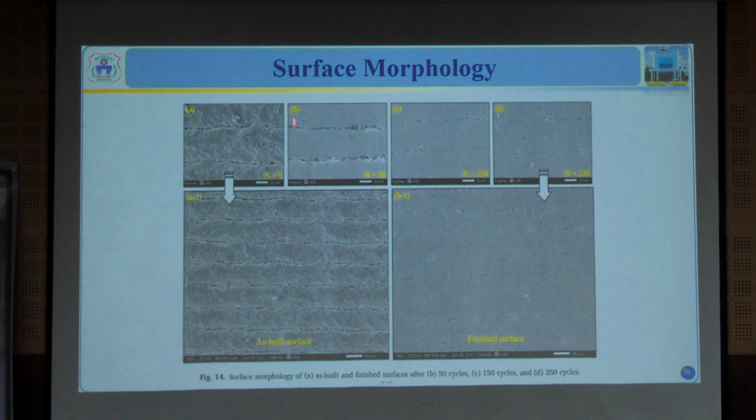And you can also see the surface morphology with respect to different cycles like 50 cycle, 150 and 250 cycles, and how the final finished surface looks like, and how the before surface looks like, as a 3D printed component and then finished component.

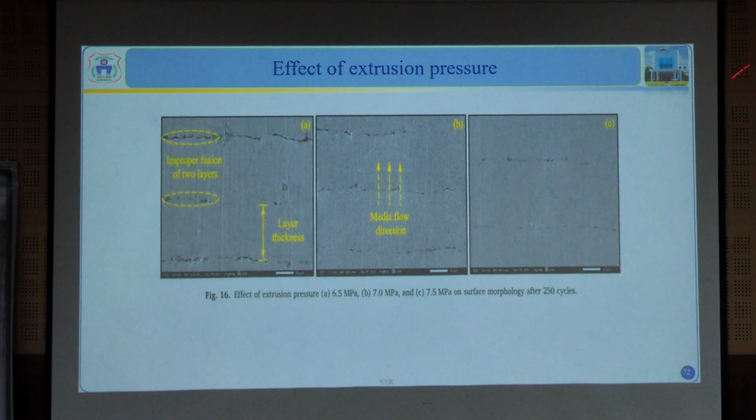And the effect of every parameter is discussed, so to know the media flow direction, and also to observe the layer thickness, as well as mainly targeting on how the finished component, as built component and finished component.

So as I said, there are two research areas majorly working. One is hybrid AFM, so people trying using different hybridization like magnetic field assisted or rotary or drill bit. That is one area.

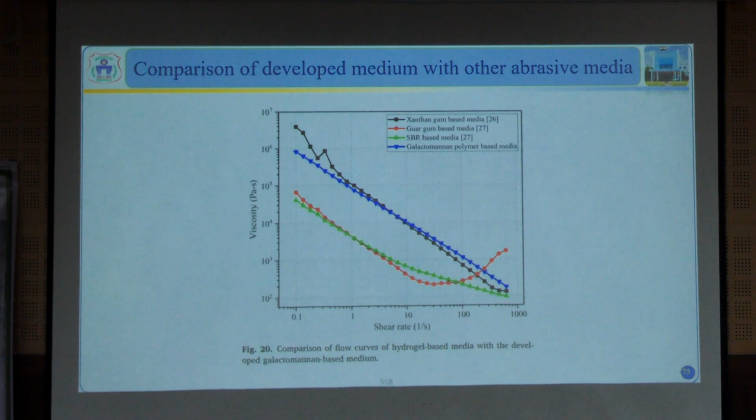Second is using different types of media. So some people in the literature used gum based media, some guar gum based media, some SBR meaning styrene-butadiene rubber, natural rubber, and galactomannan media. Some used natural polymers, some used wax, some used honeybee wax.

And now we are working on rotary ultrasonic. As I said, during my PhD I worked on ultrasonic assisted AFM, and in the literature we can see rotary. So when these two are combined, the rotary technique, rotary assistance, and also ultrasonic assistance is combined. So this is our ongoing project we are working on. The name of the project is rotary ultrasonic abrasive flow machining. So when the two effects are given, how are the results.

This we got under core research grant DST, and we are also using ultrasonic, this one, acoustic emission. We are using one sensor to find out the online monitoring of the abrasive media.

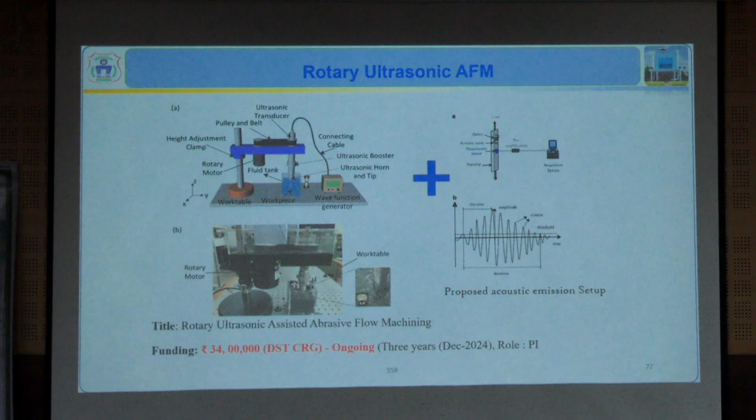We wanted to predict the surface roughness, so we wanted to know when to replace the media, or when to stop the machine, when we wanted to know information like when we reach our required desired area, something like that. We are using the sensors, so this sensor is fixed to the workpiece, and then it will continuously monitor the media flow.

So there is another variant called chemo-mechanical abrasive flow machining. We are working on this, we started to work on this. In this particular process, chemicals are used, so it's a combination of chemicals.

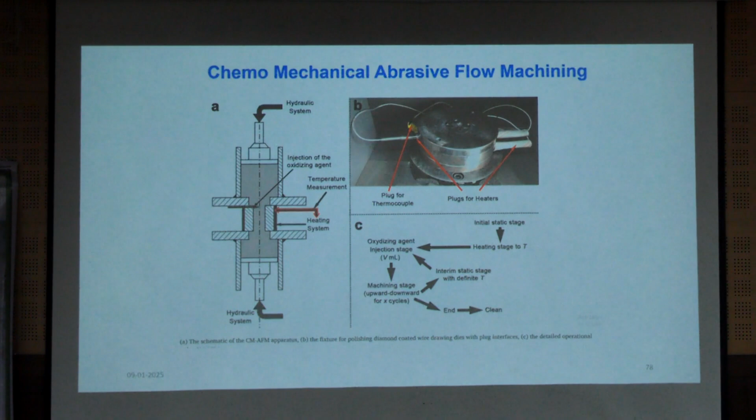So you can see here the abrasive flow machining, we are pumping to and fro, and there is an injection of oxidizing agent inside the tooling zone, and there is a heating system. So how the chemical agent, oxidizing agent we are using, and how it reacts under different temperatures, and the fixture design for that, right?

And basically if you see the working principle, the abrasive media and the substrate and the diamond film, the oxidizing agent - so how this oxidizing agent helps in finishing, we are working on that also.

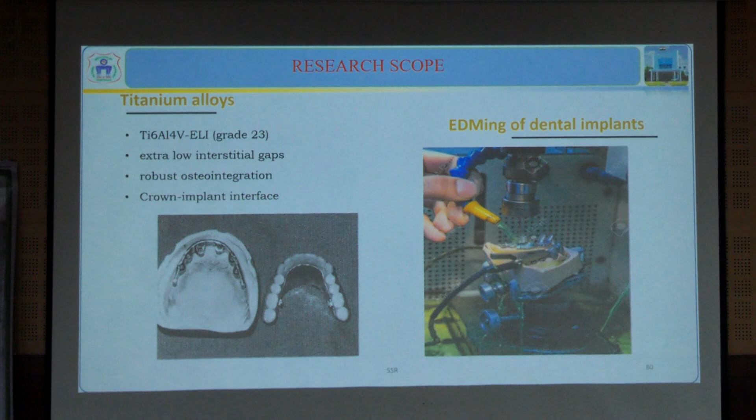So there is a lot of scope in finishing dental implants which are complex in nature, and medical implants which are complex in nature. To see the overview of the parameters, in simple AFM we have machine based, media based and workpiece based, whereas in hybrid AFM we have magnetic flux density and current in magnetic assisted, and shape of the rod, rotational speed in centrifugal force assisted, and drill diameter in drill bit guided, rotational speed of the workpiece in RAFF.

Current intensity and voltage, abrasive paste, etc. in electrochemical, and also there is a chemo AFM. In UAFM, the application of vibration speed - so these are all the new parameters.

Introduced in the field. Okay, so I would like to stop here. In the laboratory session, you can see the setup and how it is functioning, and how we prepare the media. Also 3D printing lab is possible to see. We can also see the 3D printing lab as well as this abrasive flow machining lab in today's session.

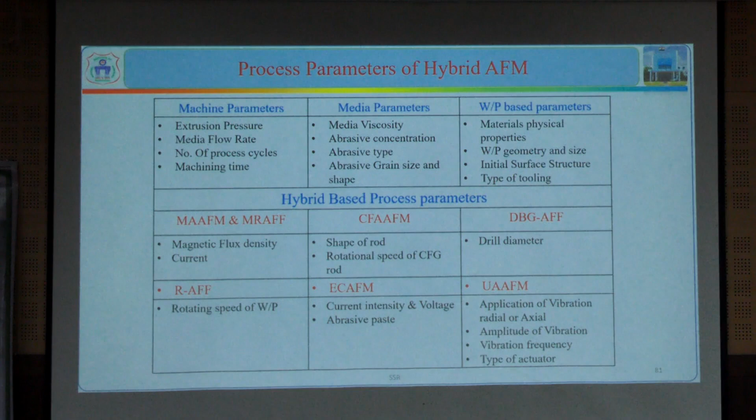Yes, so that's why it's not much affecting on the material. Because the abrasive media, with the help of thermocouple and also in the literature, it's not more than 70 degrees, so there is no effect on the work surface. Material properties are not going to affect because it's working under lower temperature only - the machining is taking place at lower temperature only.

Still any questions? Reusability of the media, yeah.

Now we are using silicon carbide abrasive. Mesh size, we have 4 or 5 mesh sizes, 120, 80, 180.